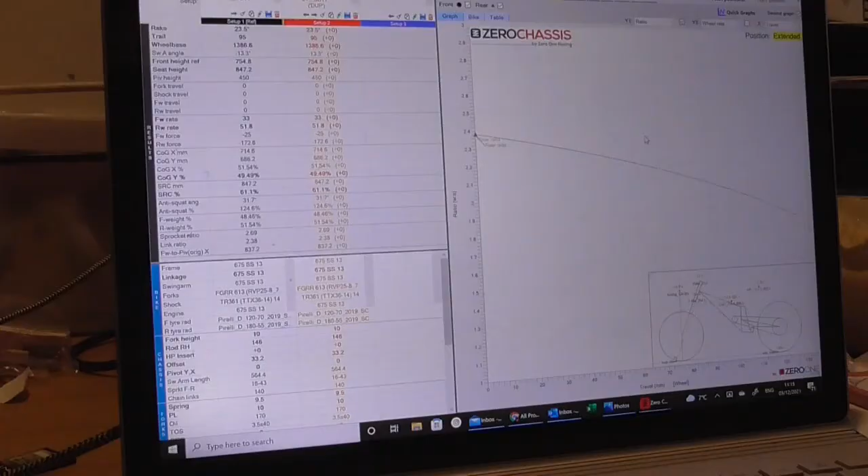Okay, so let's take a look at the chassis program. What we have here in front of us is, on this side we have all the key dimensions of the bike, which has all been calibrated from the information which I have put in here. Now it's this column here that I send out a setup sheet to my customers. I ask them to fill in what information from that they can give me.

So things like, what are the length of the forks, what are the springs you have on, what tyres do you have on, gearing do you have on, type of chain. Pretty basic stuff. There's a few extra questions in there, like what is the preload on the front, what is the preload on the rear in terms of number of turns, and oil gaps in the forks is always useful to know, but very often most people don't know that answer, so I can work around that information, but I often have to standardize in some way and put in a figure that I believe is fairly standard.

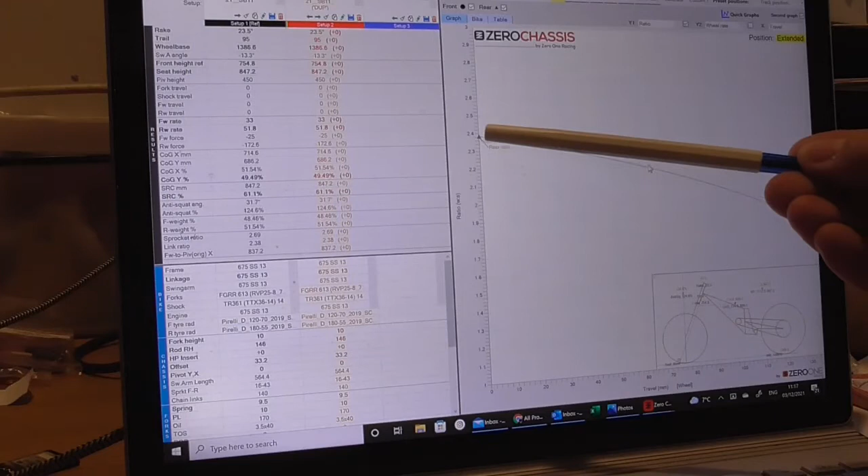Over here on this side you can see this is the rising rate linkage on the back, which we've talked about on a number of occasions. So this is the OEM linkage system on the bike, and you can see where it starts and then it ramps up in terms of its resistance as it goes through its stroke. Down here we have a line drawing of the motorcycle. That's just simply emulating some of the numbers that we can see over here, so nothing major in there.

So what I'm going to do is I'm going to start making the respective changes. So let's assume for a moment that I get asked to put in or supply an ABM3 link. Now, what you can see is the standard dimensions of the bike here. And I'm just going to put this into static 1G. So what that's effectively saying to me is that the bike is resting on its own weight, and these are then the dimensions that I get. So 23.3 degrees on the rake and just over 94 millimeters on the trail. Here's our wheelbase, swing arm angles, etc, all the way down, giving me various pieces of information.

Now what you see has happened is when I put in the link, it's massively changed the geometry of the bike, and that's because I haven't specified specifically the link on the bike. So what I can do is I can alter that down here, but before I do, what you see the program is doing is highlighting areas in green. The lighter the shade of green, the less the change, and so the opposite is applicable. Now it's changed our rake angle from 23.3 to 20.4. It's changed our trail from 94 to 76.6. This is why it's important that you never put a linkage in like this without having it run through some sort of chassis program and checking the dimensions.

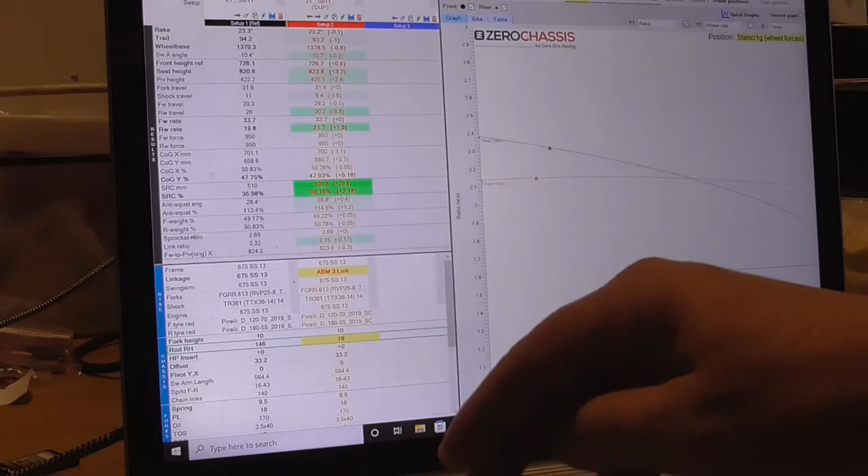What I'm going to do now is I'm going to alter the length of the drag link, the adjustable drag link that goes with my linkage, and I'm going to see where that brings me. So what we can see now is an improvement up to 22.7 and up to 90.3, but in my opinion that is still a long way from where we want to be. So I'm going to increase the length of that again until I start to see some changes in dimensions. Now we can see that actually I'm going to have to make the link quite long. We'll move up to 180 and see where that sits before I even remotely start to get back to where I want.

And what is key and interesting that's happening here, and this is what takes me so much time in a chassis program, is we're now at a rake angle that's above where we were originally, and our trail figure is slightly above where we are originally. But in an ideal world, I'd like to keep this rake angle figure but extend out this trail figure.

So in my opinion, the handling of the 675 is extremely good. Turning is really good, but they sacrifice trail on that, and therefore the bike is not as stable as you want it to be. That's why you have to have steering dampers and such like on it. And in order to give you confidence, I think it's important that the bike is stable. So I'm going to come back to that in a minute.

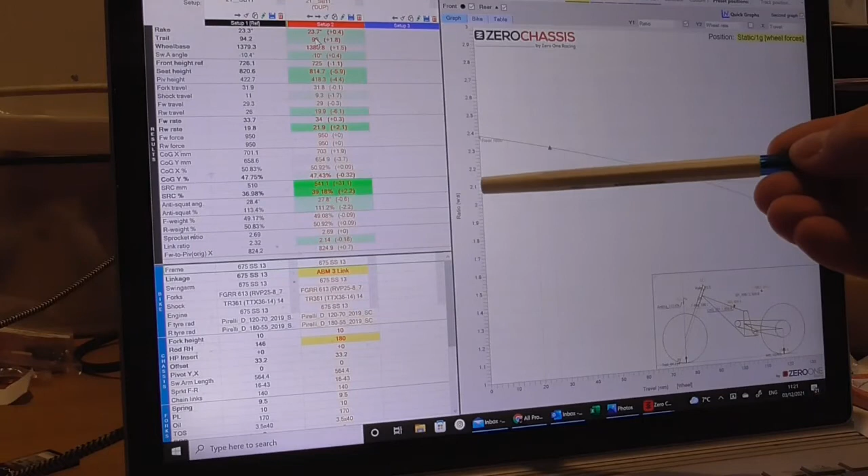What I also want you to notice here is our linkage, our rising rate. So now you can see the sort of rate curve of a linkage system, and that gives you a clear comparison between the OEM one. So this is starting off harder, so that you have to have lesser weight spring on the bike, and it's keeping its progression down to around 5 or 6%, whereas this one is going up considerably more. So this is where we get our better tyre wear, or part of it. There's also some figures in here that change.

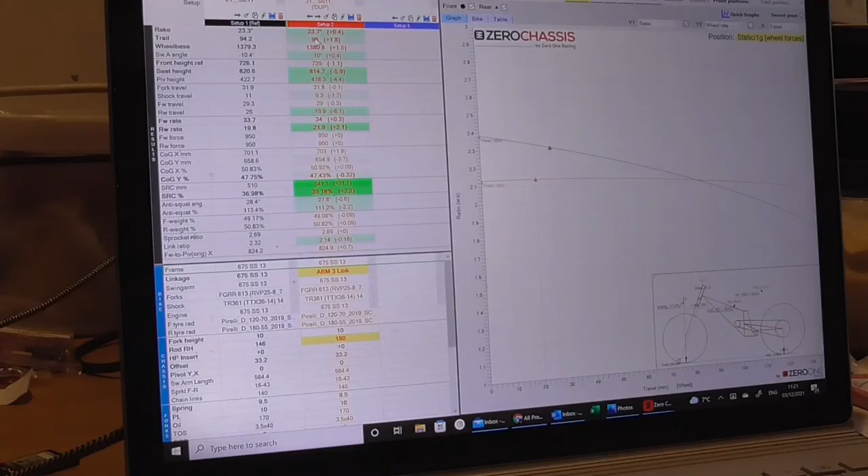Now I would have to go to quite a bit of extensive work here to try and get these figures up, to get this trail figure up closer to 100 millimeters, and to try and keep this rake angle. And I'll be doing that with spring rates, various preload settings, etc., and trying to bring the bike back to roughly where I want it to be. But there is a far simpler solution.

I've talked before about yokes on the motorcycles, and most importantly adjustable yokes. So the technology that you're seeing here is pretty much Moto2 stuff. The linkage is a Moto2 type linkage, and if we were to put Moto2 yokes onto it where we could change the offsets, there's a little spacer that goes in around the steering stem that basically moves the yokes forward or backwards. So obviously you have to put one in top and bottom.

But if I look down here at my offset and it says 33.2, if I was to change that and put in a 5mm spacer that effectively brought my offset down to 28mm, now I'm in a really interesting place. Now I've got lots of trail, I've maintained my rake angle. So what I'm going to do is drop this down to 175, and I get 99.3mm of trail, and I get 23.3 degrees of rake. That's a nice place to be, and that's why yokes are so incredibly helpful.

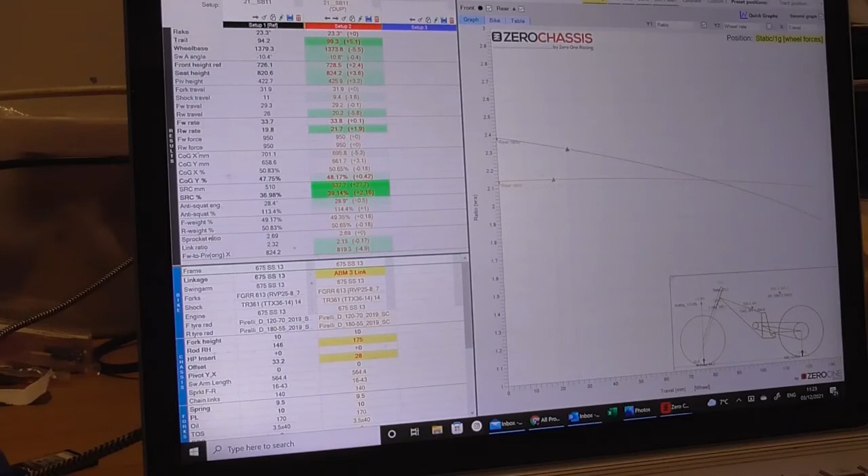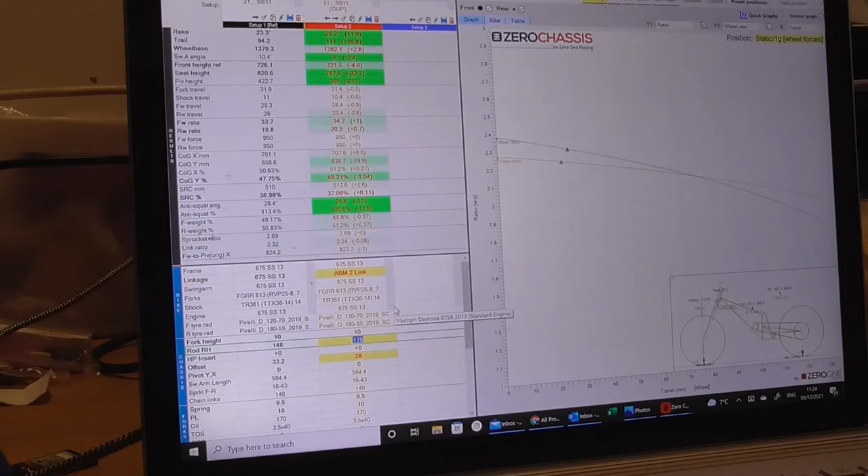If I put an ABM 2 link into the system, and that's our track day linkage, the ABM 3 link tends to be fast track day guys and racers. You can see that our figures are pretty massive now. Our rake's up to 25.2 and our trail's up to 111. So I'm going to drop that down to 155. And again, I'm sitting in a pretty good place, 99.5 millimeters of trail and 23.3 degrees.

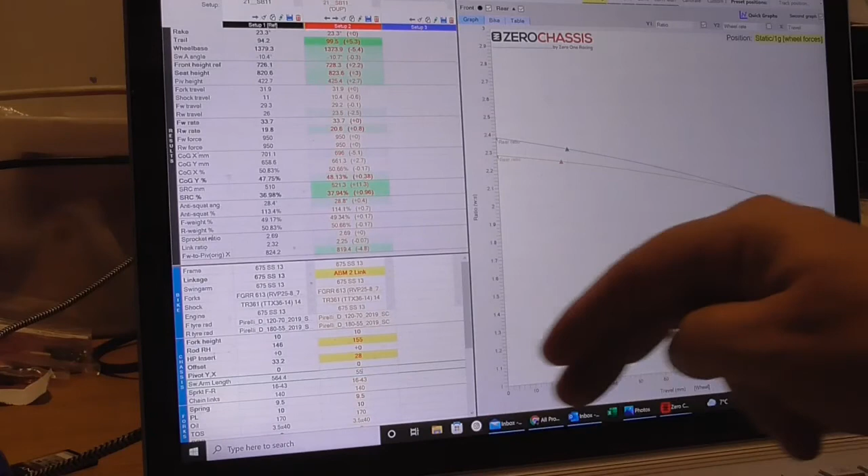The purpose of this software is that when you make a change to the motorbike, it gives you a no argument result. Here are the numbers. As the famous saying goes, the numbers don't lie. So when I make various changes, if I was to put on some different sprockets and I ended up shortening my wheelbase, I want to ask myself the question, what happens to the bike when I do that?

So I've taken 14 mil off of my swing arm. You can see it's changed the rake angle, so it's made the bike steer slightly slower. It's pushed up my trail, which is no bad thing. My wheelbase, as you can see, is significantly different. You can see where I am with seat heights and front height references as well. There's an awful lot of stuff in here that has changed, and one of the other things down here is weight bias. 48.78 on the front and 51.22 on the rear.

So every time I make these changes, it changes values on the bike, and I'm not saying that that's an issue. I'm saying that it's important for you to know what those changes are. So essentially, that's how the chassis program works, and I hope that's given you some insight as to why this is such a very useful tool.

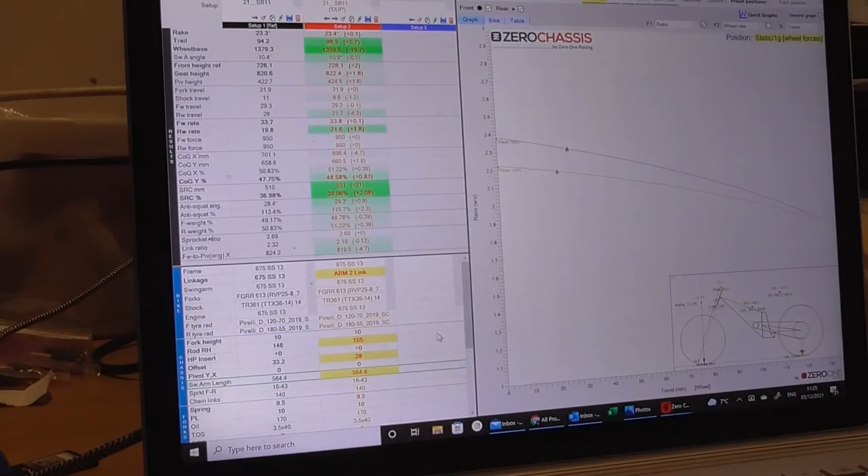Okay, so there you have it, chassis program. I hope you were able to follow some of that, and more importantly, see what drastic changes it makes to the motorcycle when you input certain numbers. I think it's a great tool. I think everybody should be using it, especially in racing or track days, so you know exactly where your bike is at any given moment. You're not making random changes without really understanding the full effects.